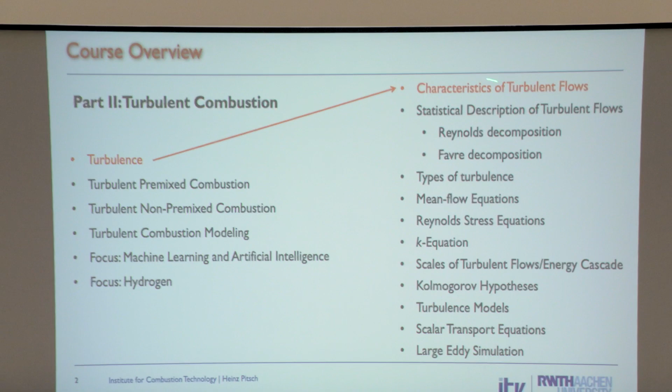The next lecture here is on turbulence. We're going to talk about turbulent combustion, but before we do this, I want to give you an overview of what turbulence is. So we'll talk about a few characteristics of turbulence, statistical description, the so-called Reynolds decomposition. Then we talk about the mean flow equations, something like the kinetic energy equation, and then really the core of all turbulence theory, the so-called Kolmogorov theory, and then we talk a little bit about turbulence modeling, and here maybe large eddy simulation.

So what is turbulence? Turbulence is composed of eddies that mix, and turbulent flows are random—they are not predictable, not deterministic. They lead to much faster mixing than laminar flows. That's why almost all technically relevant flows for us, combustion where we need mixing, are turbulent, because then you can accomplish reactions much faster.

Now, what's interesting is if I take a mixing layer, I have just fuel here, I have just air here, and then I let them mix in a laminar way, it just takes forever. It's just diffusion. Now, there's one way of mixing.

There's another way of mixing where I would say take two immiscible fluids. They wouldn't diffuse into each other—like oil and vinegar, whatever, or oil and water. They don't mix with each other really well. And so let's start to stir them.

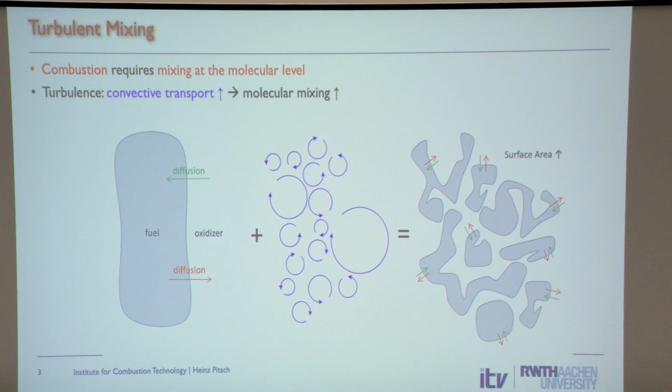In the beginning, I had just fuel here, oxidizer there, and then I start stirring—that's what the turbulence does. Then I get regions that are just fuel, and other regions that are just air. The turbulence itself just moves stuff from here to there. That's what it does, nothing else.

So did I increase the mixing rate up to that point? No, because I still have only fuel and air—no mixing has happened. But what I did is I increased the surface area a lot, and because turbulence also causes local strain, I also increased the local gradients. And that, of course, makes mixing much, much faster.

So when we think of turbulent mixing, we often think of it like this: we have this stirring, and then the stirring leads to surface area, and then we get molecular mixing.

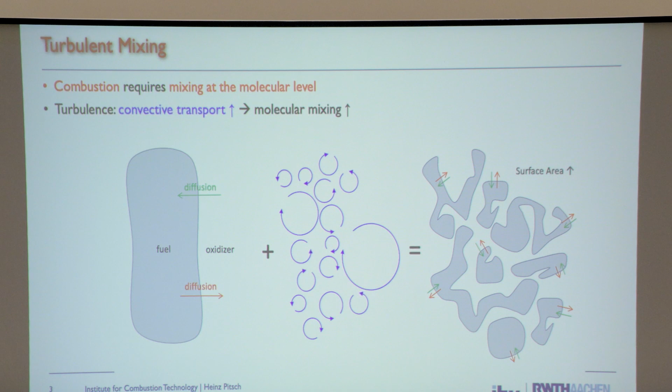Now, when turbulence people, fluid mechanics people think about turbulence, they very often don't care about exactly what the mixing rate is. They worry more about—here I had just fuel, just air, and here they seem to be mixed, okay. But for us, it's very important that if you want to have chemical reactions, you need to mix fuel and air really on the molecular level. If the fuel molecule and the oxygen molecule are not next to each other, they can't bump into each other, reactions are not going to happen, okay?

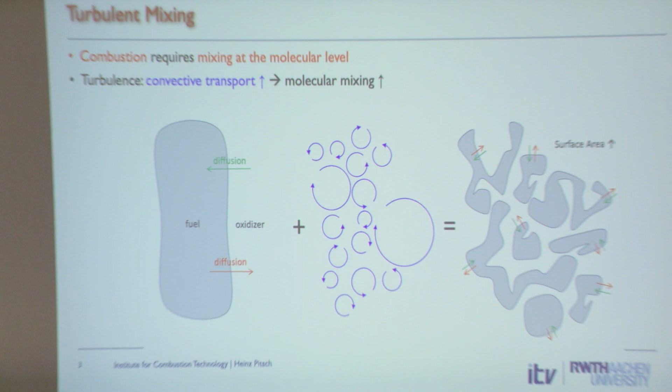So for us, it's not the large-scale stirring that is very important. For us, really, the ultimate outcome of how much fuel and air really mix on the molecular level, that's what's important for us. So that is something we need to keep in mind.

Now, we often think of turbulence as these eddies—so here you see we have large eddies, smaller eddies, and yet smaller eddies. The other thing you see is if you have a large eddy—I should redraw the picture—but if you have a large eddy, maybe it steers things this way, then inside that large eddy you can have a smaller eddy, and it might go the other way. And inside that, you have yet smaller eddies, and they go yet the other way.

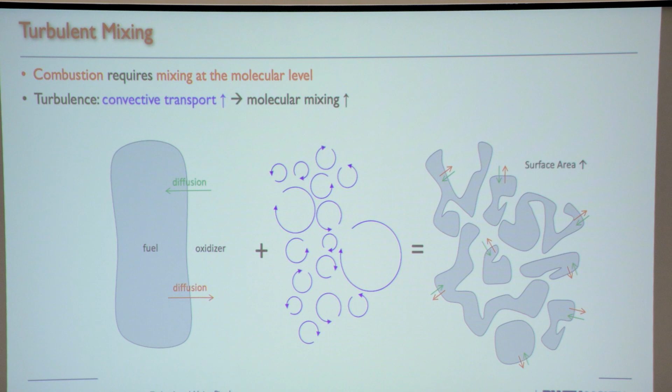And that makes up the chaotic nature of turbulent mixing. Now, turbulent eddies—maybe turbulence doesn't really consist of eddies, but we say turbulence has different length scales, and I associate a length scale with an eddy of that size. It just helps thinking about it.

We have different velocity scales. The large turbulent motions have a certain velocity associated with them, and the very tiny turbulent motions have a different velocity, maybe the spinning velocity of the eddy. So we look at an eddy like this: it's characterized by a length and by a velocity.

From these two, of course, you get a time scale also, but the time scale is not independent—it's just the length scale divided by the velocity scale. Also we need to keep in mind we have different size eddies, and they can superpose onto each other. Each size is characterized also by a different velocity or time scale, whatever you want.

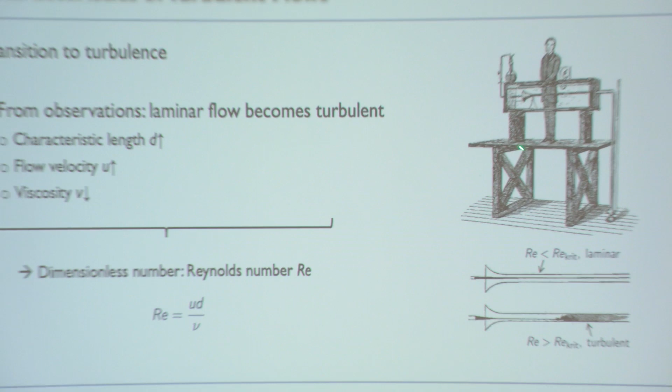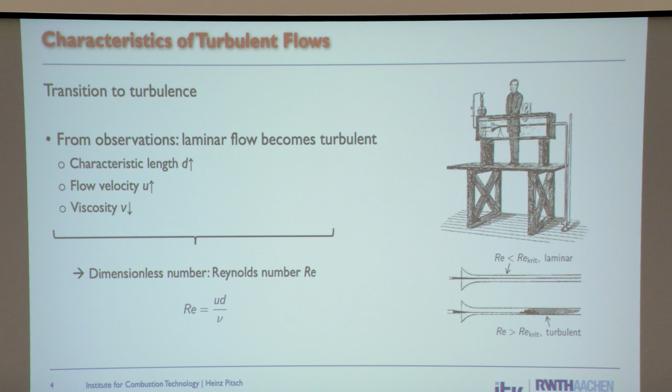So, here's Osborne Reynolds in Manchester, doing his famous experiment. He has this pipe with a flow through it, and he puts a dye in at the beginning—there's this black line, the dye—and then he observes what happens to the dye. Nothing happens to it; the dye doesn't really mix with the rest.

Then he thought, what if I increase the Reynolds number? No—what if I increase the velocity? So he increased the velocity, and all of a sudden this thing bursts up and mixes instantaneously. And he thought, oh, that's interesting—so it depends on the velocity.

And then he thought, what if I increase the diameter of the pipe? So he used a bigger pipe, and bigger, and then he saw again it bursts like this. It's also a faster transition with a larger diameter.

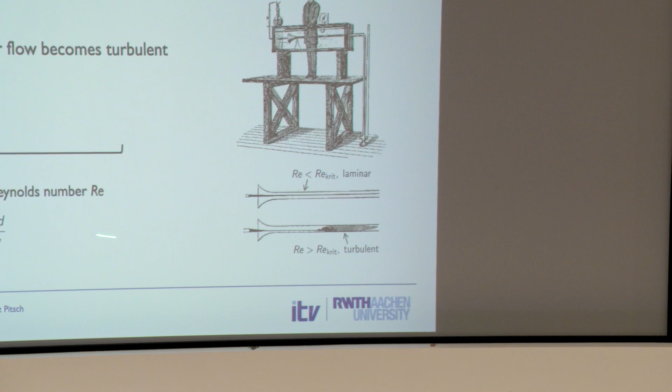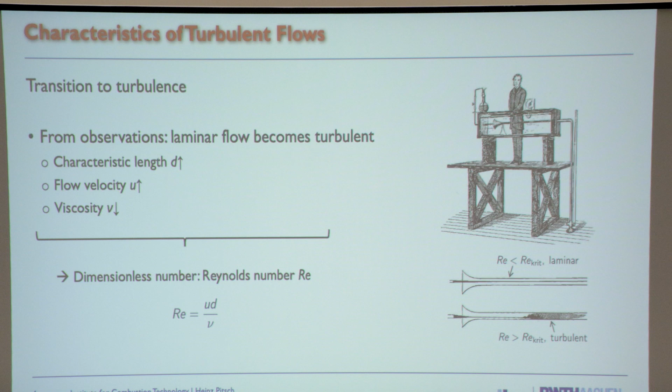Then he used different fluids with different kinematic viscosity, and found it's inversely proportional to the viscosity. Another way to do this is to take the incompressible Navier-Stokes equations, make them non-dimensional, and a non-dimensional group pops up in front of the viscous term, which we call the Reynolds number.

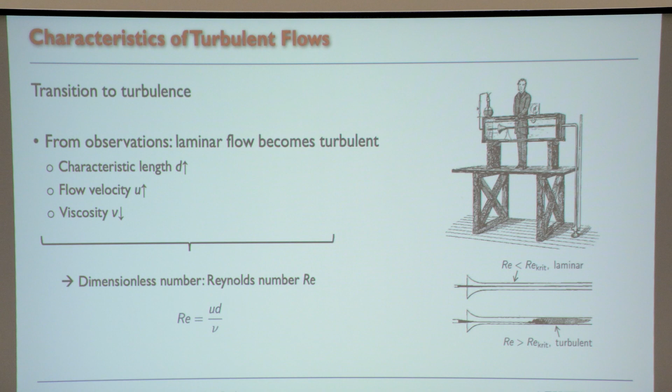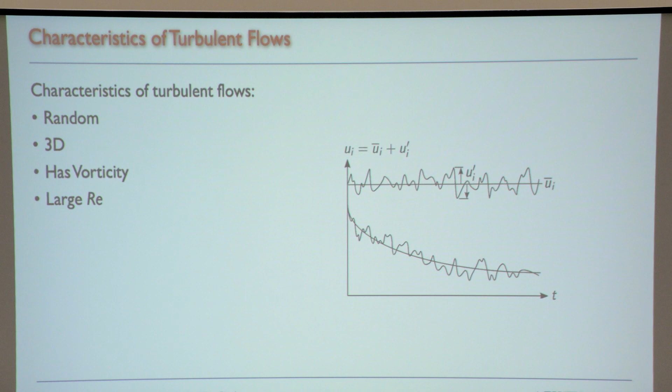Now, one thing we didn't say: turbulence is always 3D. We're not going to talk about this much more, but it turns out if you have a two-dimensional flow, it cannot be turbulent. That's because of what's called vortex stretching—the mechanism for turbulent dynamics depends on a process where you have a vortex, and it's being stretched.

In fact, the transfer of energy from the large to the smaller scales happens through this vortex stretching. If I have a vortex in 2D and want to stretch it, I need the third dimension—I can't stretch it in two dimensions. So turbulence is always 3D. That's why large eddy simulations, where we try to resolve some of the turbulence, are always 3-dimensional simulations—you cannot do a 2-dimensional simulation where you want to resolve part of this. Same for direct numerical simulation; they're always 3D.

Do you see anything else here? Vorticity is important. And of course, this transition happens at large Reynolds number.

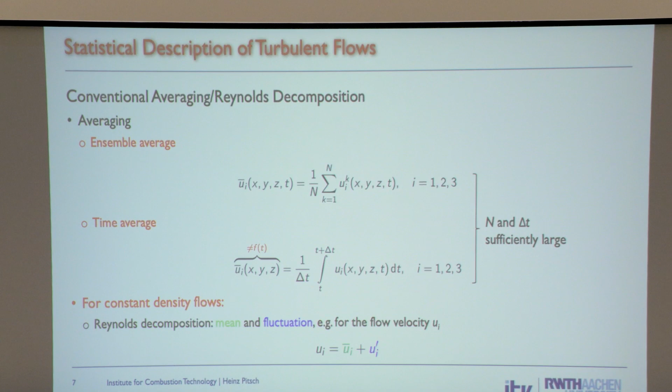Now, one important technique to analyze turbulent flows is the Reynolds decomposition. In engineering, sometimes we are not interested so much in the fluctuations. We're interested in the mean mixing rate. The fluctuations happen on very short time scales, but we're really interested in seeing, for example in this engine, do we have enough space, do we have enough residence time for fuel and air to mix. So we are often interested in mean quantities, which is why we introduce this Reynolds decomposition, where we say the local instantaneous velocity, we decompose it into a mean and a fluctuation.

So how do we define the mean? There are different ways to do this. One would be to take what's called an ensemble average: I do many experiments at one point, and I just take the average of these individual experiments. I could do this at every point in this room, and I get a mean velocity at every point. The other way would be to take a time average, but that only works if the mean is independent of time.

If the mean is a function of time, this doesn't work. People sometimes say, well, maybe I make the averaging window not so large. No, then you don't get the mean. For the mean, to really get the mean, the time averaging window has to be infinitely long, right? It has to go from now to infinite time.

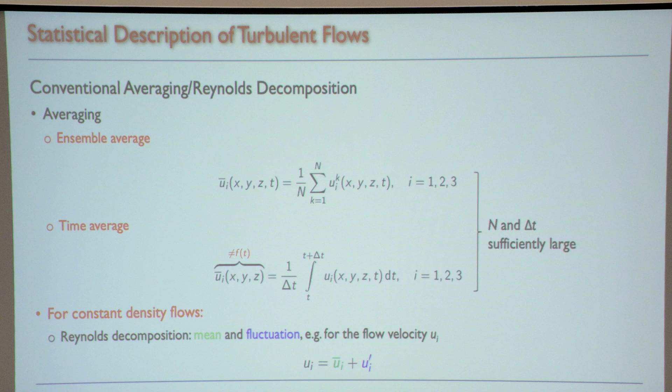So when I think about this, I always think of the ensemble average, for two reasons. First of all, it's a correct definition, it always works. Secondly, it's a sum, not an integral. Most people find a sum easier to think about than integrals, even though it's the same anyway. This also makes it a little easier to work with differential equations sometimes.

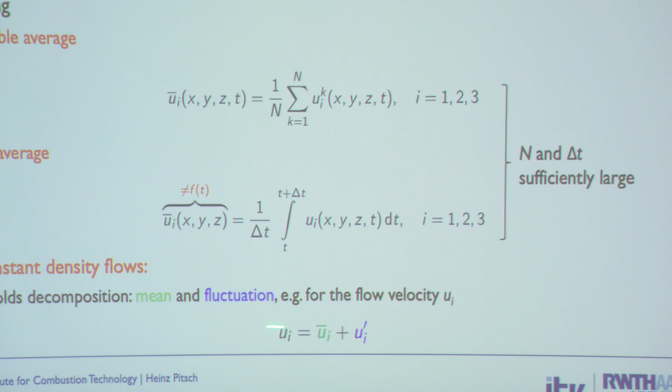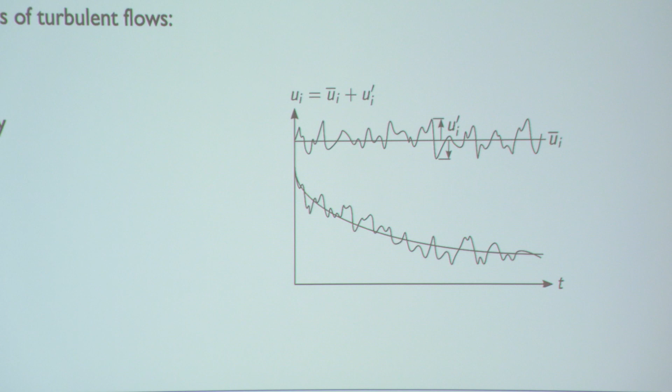So that's what we do. We do this Reynolds decomposition where we define the mean like this, and then the fluctuation is just the difference between the local instantaneous value and the mean. Going back to this picture, at each point in time, the mean is the straight line, and the fluctuation is always the difference - sometimes positive, sometimes negative. It's defined such that the average of the fluctuation is 0, and using this definition, it's very easy to show that this will be 0.

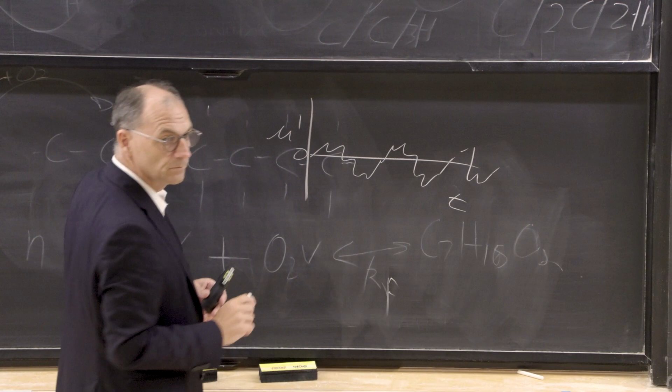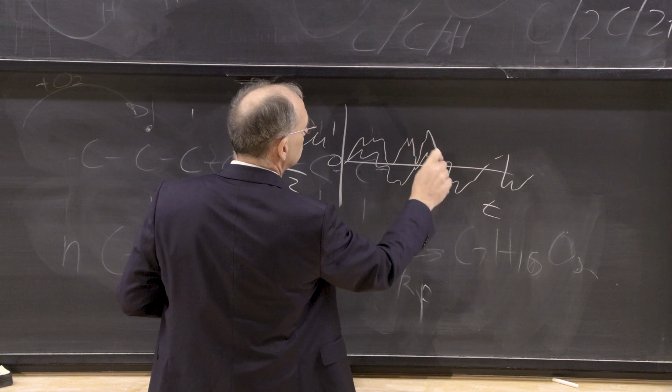Then, if you have one fluctuation times another fluctuation, and you average these, they're not necessarily 0. An easy example: if I have a velocity fluctuation, u prime as a function of time, fluctuating around 0, then if I average this, it will be 0. But if I take u prime squared and average this - the square of it - it will be all positive. And if I average a positive function, then it's not 0. So correlations of different fluctuating quantities are not 0.

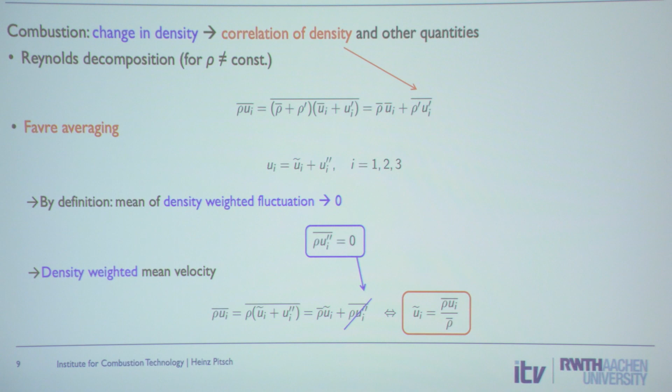So in fact, we call this - the example I just showed - something like the standard deviation, or as we call it here, the root mean square. So this is the fluctuation squared, mean, root. It should be called square mean root, but it's called root mean square.

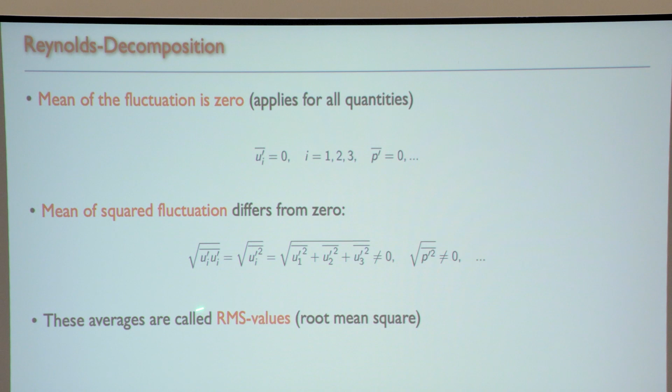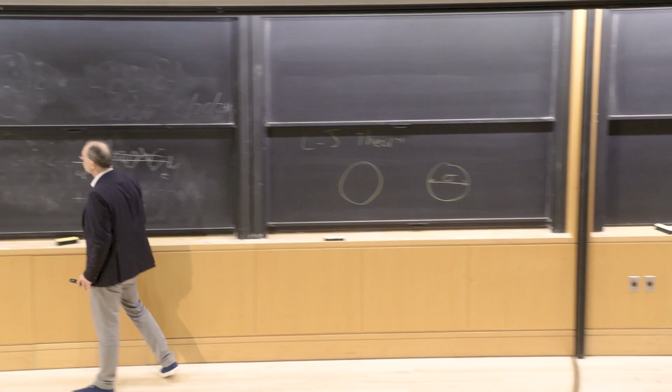So what's interesting is, if I write the Navier-Stokes equation, in our case we typically have variable density flow. If we have variable density flow, then I start here with the momentum equation. The first term is d(rho u) divided by dt.

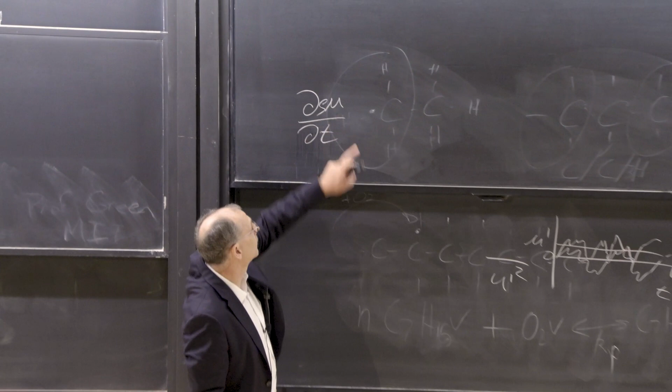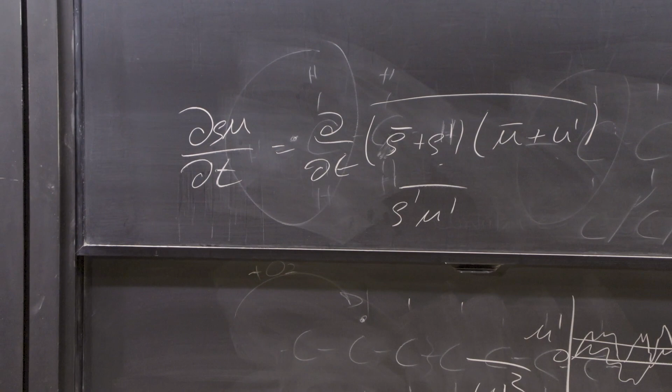If I introduce the Reynolds decomposition here, I get d by dt of rho mean plus rho prime, times u mean plus u prime. You see I get a term rho prime u prime, and when I take the average of this, I get a lot of these terms—a lot of correlations between density and something else. So that makes things very complicated.

So somebody came up with a smart idea to introduce a density-weighted average, defined in a way so that these correlations don't appear. That's shown here—that's called the Favre averaging. So that's typically relevant for us.

So this is what I just wrote here. Exactly, so I get these correlations. And now I introduce the Favre averaging. I call this U tilde and U prime prime—it's different from Reynolds averaging. So I define this, and I get these correlations. I want to define it so that these correlations here are 0.

If I take rho u mean, it is rho times (u tilde plus u prime prime), which is rho mean u tilde, plus rho u prime prime mean. I define it now so that this term is 0—that's my definition of the mean. Then I can solve this for u tilde, which is rho u mean divided by rho mean. So if I define my mean like this, then this will be 0.

So that's what we call Favre averaging, and it leads to the fact that, if I do the same thing here and average this, it just gives me rho mean times u tilde. So I don't get these nasty correlations.

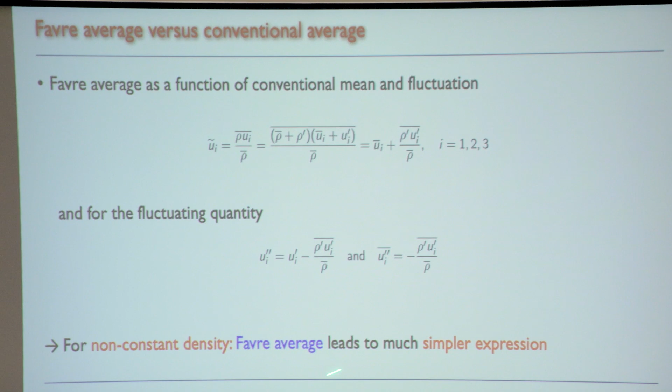The only point where you need to worry about it is when you want to compare a simulation with an experiment, because the question is: did the experiment evaluate this mean or that mean? That's important to know. So for non-constant density, Favre averaging leads to much simpler equations.

They describe all the randomness of turbulence, which for a long time was questioned by researchers—before one was able to solve these, they said an equation, if you specify initial conditions, is deterministic. But of course now, with chaos theory and so on, we know that's not true.

You always have a disturbance, inaccuracies. You cannot specify a state to absolute accuracy, and even though you think you have exactly the same state, it's very slightly different. These perturbations in a nonlinear system can grow up to the point where they are of leading order.

And so this will change the local fluctuations. It will not change the mean, but it will change the local fluctuations. So that's what we say—the local fluctuations cannot be predicted.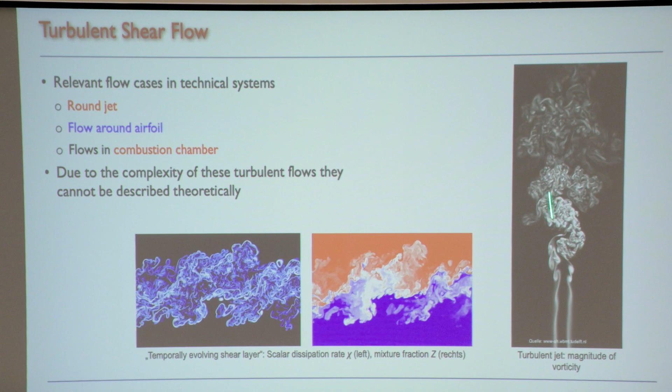So these are a few examples of relevant cases: a round jet is a relevant case, a flow around an airfoil, for example, flow in a combustor. And we are typically concerned with flows that are related to combustion.

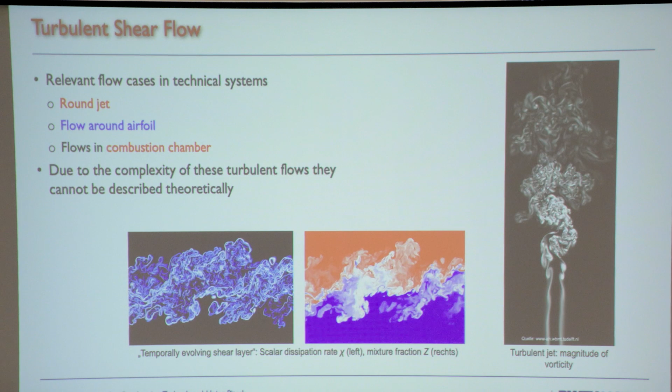Now there are two different ways to produce turbulence. Turbulence comes from gradient, from shear. You have shear and you have viscosity, and that creates vorticity. The vorticity then makes large eddies, and they make smaller eddies, and so on.

So there are two ways to produce shear. One is to have a free shear flow—I just shoot material into another material, like here in this jet. The second way to have a gradient or shear is to have a flow along a wall, because a wall always has a no-slip condition.

The flow at the wall, the velocity at the wall is always zero. And if I flow past the wall, I get shear. I get a boundary layer and I get shear. So we distinguish between free shear flows and wall-bounded flows when we talk about turbulence. And because in combustion we usually try to keep it away from walls, the generation of turbulence typically comes from these free shear flows. So here we are more concerned with free shear flows than with boundary layers. We're not going to talk about boundary layers here.

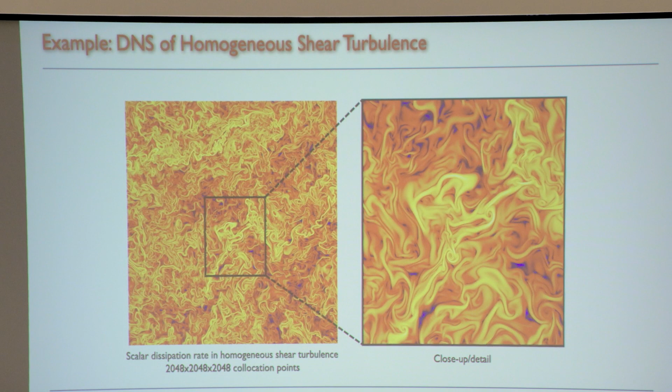Now, one thing that's interesting is we said earlier you have these turbulent eddies. And if you look at a picture like this, you don't see an eddy. I don't see anything that's really spinning. But what you do see, if you look at it, you kind of see coherent regions, I would call it.

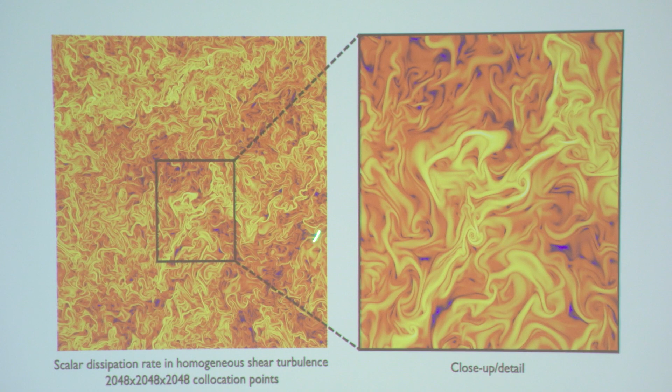I would call this yellow spot a coherent region. This dark spot is a coherent region. And then if I look inside this coherent region, here, if I look down at the larger scale, again here I get a spot where I would say this seems coherent, here a darker one, here a darker one, and so on. So you get these, and if you would look at the motion, these are regions also that kind of move together. They don't go like this, but they kind of move in a coherent way. But then inside these coherent structures or motions, you get smaller coherent regions, or here actually you see an eddy really, or even smaller coherent regions. So you get a lot of different scales.

So we have sometimes in these simulations - this is a simulation of a shear layer - you have a flow that goes to the right on top, a flow that goes to the left on the bottom, and this here really just shows the scalar dissipation rate. This is really the local mixing rate. This is where we have strong turbulence, and you see that you get a strong change if I go from the top here to the bottom, if I look at the cross-section.

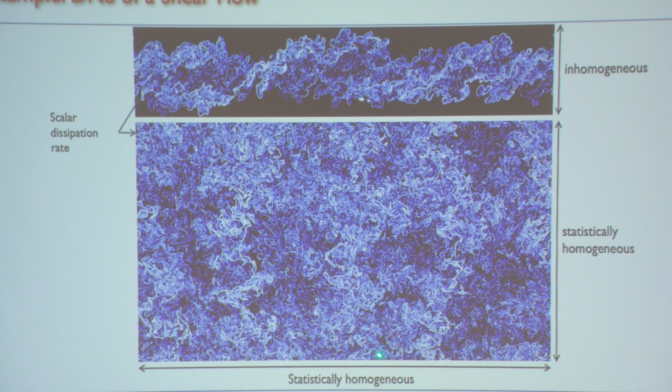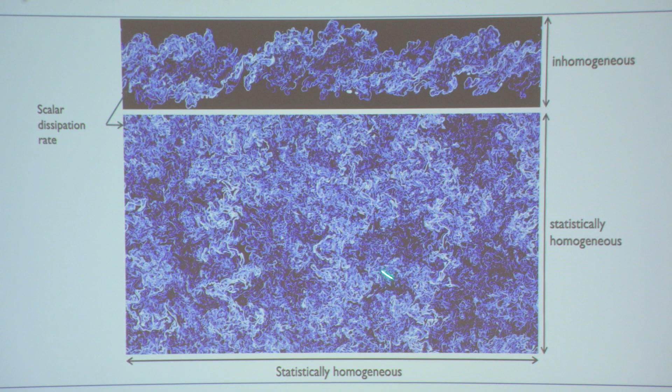But if I look at this thing from the top, that's how the simulation is done. It's homogeneous in this direction. It's all the same in this direction. But you see there are changes, so we say it's statistically homogeneous. The average values are all independent of position in this direction. But of course, locally, or at one instant in time, it is different.

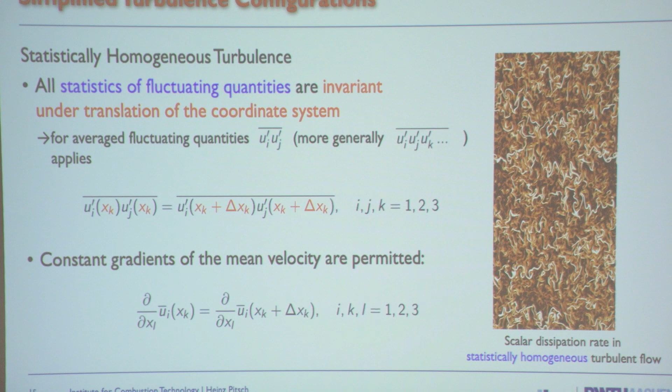So from that we define something very often used in turbulence theory, and also when we do simulation - these DNS simulations. Oh, I didn't say what DNS simulation is, sorry, I got sidetracked. So what is DNS simulation? We know how to write the Navier-Stokes equations. We know they describe the turbulence. So we can actually solve the Navier-Stokes equations without any assumptions. And that gives us simulation results like this, if the Reynolds number is large enough.

The problem is, and I'm not sure if this is mentioned here somewhere, how large these simulations are. So this simulation here is a very simple flow. It's, let's say, a small box, a cubic centimeter of turbulence. It's a relatively high Reynolds number, but the simulation is done on 2,000 times 2,000, in 3 dimensions, 2,000 cubed points - that's like 8 billion points.

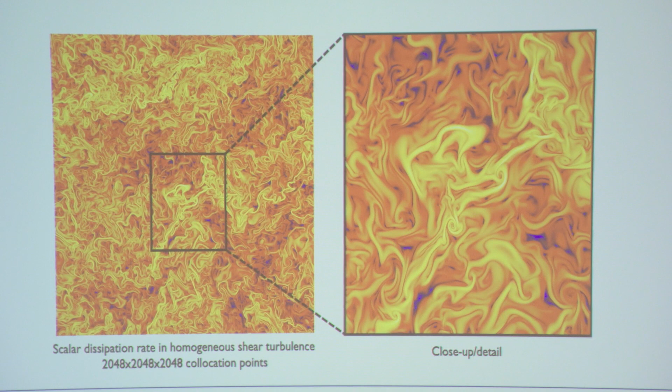And then imagine we want to do combustion. So 8 billion points, we have 5 degrees of freedom - we have the pressure, and 3 velocities, and let's say the density in our case. So that's 8 billion times 5, which is 40 billion degrees of freedom. And then if we do multi-step chemistry, maybe you have 40 species or so, then you are more at 50 times 8 billion, which is 400 billion degrees of freedom. So these simulations, even if you look at a very small box, get very, very large.

So we don't use these to compute a full combustor. We use these to compute a small little thing to understand what's going on.

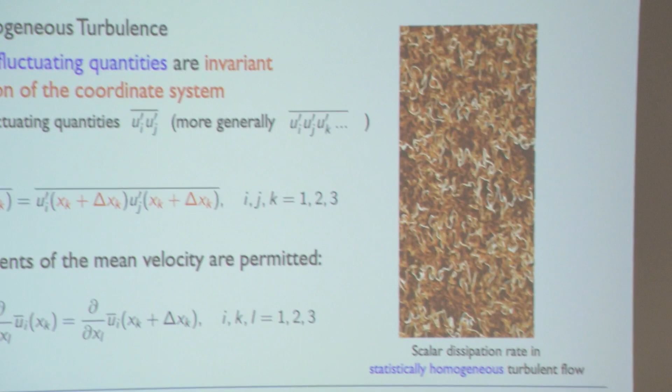Right, so when we do these simulations, it's good to have simple systems. So sometimes we define these simpler configurations. One is called homogeneous turbulence.

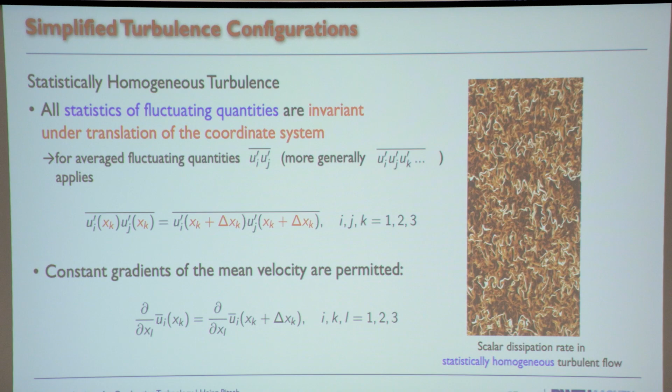Homogeneous turbulence means the turbulence statistics are invariant under translation in space. Which means if I measure turbulence statistics here, I get a certain velocity fluctuation in this direction, and maybe a much smaller velocity fluctuation in this direction. But I measure these, and then I go to some other place in space, I measure velocity fluctuation in this direction, I get the same values as over there. It doesn't mean they're the same in all directions, it just means they're the same everywhere in space.

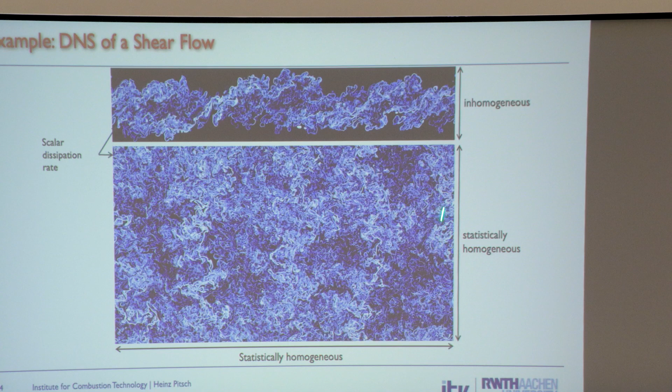That's kind of like what you see here - no matter where you are, it always seems to be the same. The local velocities are not the same, but the statistics will be the same everywhere in space. It will be different in this direction or in this direction, but they're independent of where I sit in this plane. So that's what we call homogeneous turbulence.

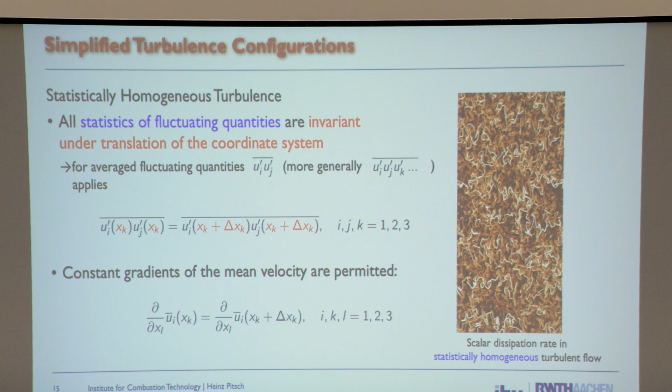The nice thing about homogeneous turbulence is that since it's the same everywhere in space, it gives you a lot of easy statistics - you can average the statistics over the whole space. At the same time, it allows you to have a velocity gradient, as long as the velocity gradient is the same everywhere. So you can have a constant shear, and constant shear means you produce turbulence. So homogeneous turbulence is nice because it produces turbulence.

The other simplification that we often make, which is also very technically relevant, and I'll tell you later, or maybe tomorrow, why this is relevant, is what's called isotropic turbulence. Isotropic turbulence means the statistics are invariant under translation in space, but also invariant under rotation of the coordinate system.

Which means I measure velocity statistics in this direction, I get a certain value, and then I turn around - or I close my eyes, you turn me around, and then I open my eyes, I'm in a different direction. Now I measure velocity statistics in this direction, and I get exactly the same. It's the same in all directions.

There's no directional dependence, which means the mean velocity needs to be 0. If the mean velocity goes this way, it's different from this way. So the mean velocity is 0, and then you get fluctuation in all directions. Because the mean velocity has to be 0 everywhere, there's no turbulence production. So this leads to decaying turbulence - you start out with turbulence, but the turbulence decays away.

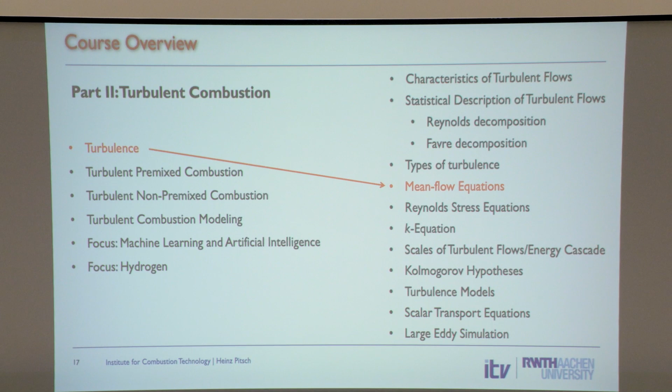Let's look at the equations - mean flow equations, that's interesting actually. So here we do this just for incompressible flows because it's easier to understand. But of course, if you want to do this for combustion, you have to do variable density equations, and you need to use Favre filtering or averaging, not Reynolds filtering.

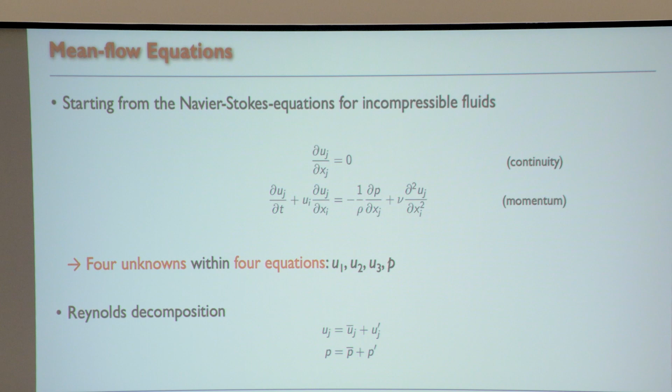So this is the continuity equation, and this is the momentum equation. One thing you probably know is that here we have the convection term - it's a time-dependent term, the pressure term, and the viscous term. Again, if we think of what these terms mean, du/dt is clear what it means - it's the time rate of change of the velocity at one point.

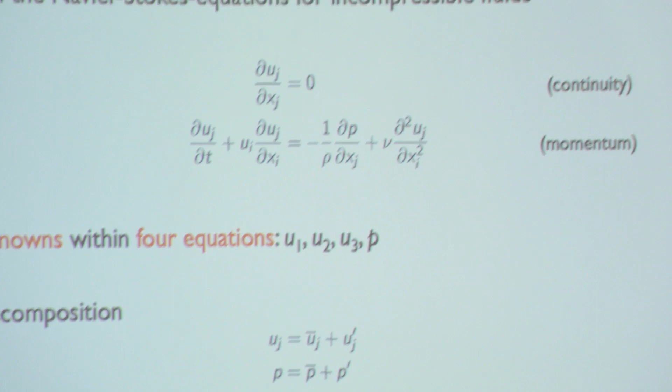This convection term is basically - these equations are written for a fixed point in space. So if I sit here and somebody walks by, I just sit here and look in this direction. Somebody walks by, I first see it getting dark, and then I see it getting light again. That's what this convection term does - it just pushes the fluid through a certain point. Which means if I have a velocity hump here, and I sit here, and the convection pushes this by, then I see the velocity go up and then go down. So that's exactly what this does.

And the funny thing is, this thing wants to push the velocity by, but it does it with the velocity. So, let's say I have a velocity gradient that looks like this.

So here's u as a function of x, and the velocity looks like this. It's low here, and high here. So this is positive velocity, it would push stuff in this direction, but it would push this point not as fast as this point. So a little later, this profile looks like this, because the higher velocity moves faster. A little later it looks like this, but this gradient will get larger and larger—that's a nonlinear effect.

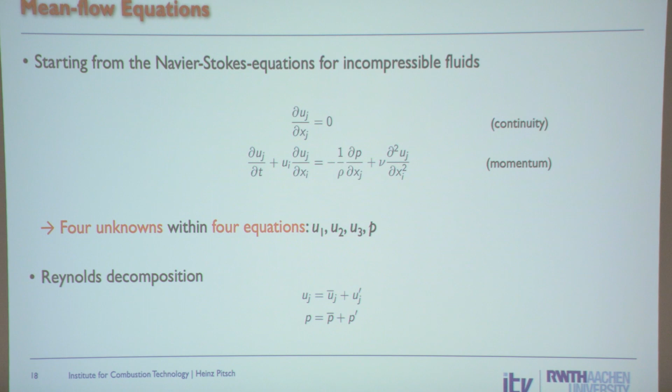How do you see this? Look at the equation, this term is nonlinear: u times u, that's the thing. All the rest of the equation is linear. So if you think of turbulence, turbulence is something chaotic, which means there must be some nonlinearity, and that's the nonlinearity you see in the equation. This is the term that causes all the interesting stuff in turbulence. Without this term, there's no turbulence. This is also the term that causes shocks. Anything complex always comes from this term.

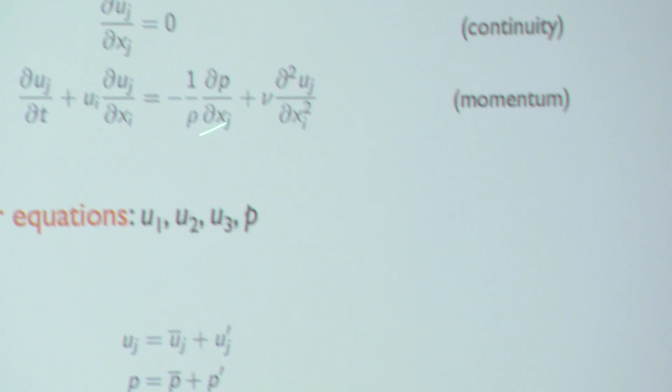So the viscosity, of course, tries to do the opposite. You have a profile that looks like this, and viscosity says a little later it looks like this. So this term tries to make the gradient really large, and the viscosity says no, I want to make the gradient really small. It distributes stuff in space. So this is the Joker, this is Batman—this one always tries to make chaos, and this one always tries to say no chaos, we have to take it easy.

And then the pressure term is just acceleration. If I want to move something from here to there, like move this desk, I need to push on one side and not on the other, then I move the desk. If I have higher pressure here and lower pressure there, stuff moves. So if I want to move fluid, I need a pressure gradient—a pressure gradient will accelerate the flow. We call a favorable pressure gradient one that accelerates the flow, and an adverse pressure gradient one that decelerates the flow. That's all the pressure does.

It's funny because push and pressure in German is the same word. Isn't that interesting? I think in German it's much easier to understand the effect of pressure, because the German word for pressure is the same as push. Anyways.

Okay, so that's what these terms do. And what was I trying to say? I mean, all the interesting stuff needs to come from this term. That's it. Oh, what I really wanted to show you is this.

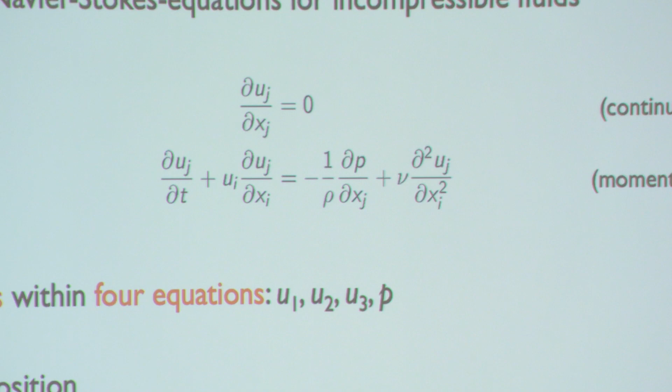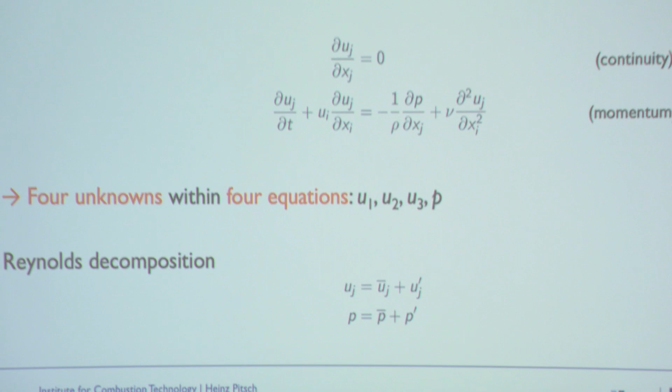Here we sometimes write this in what we call the non-conservative form. We say ui times duj by dxi. But that's the same thing as dui uj by dxi equals this plus uj times dui by dxi, and this here is zero by continuity—the first equation up there says this second term is zero. So this means I can always push ui inside or outside the derivative, it's the same thing. We use this form sometimes, so that's why I'm showing you this.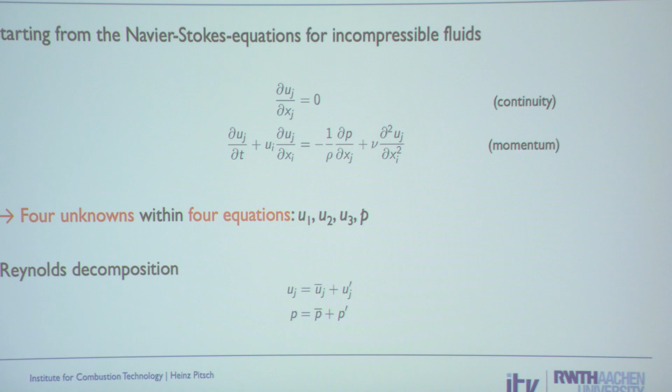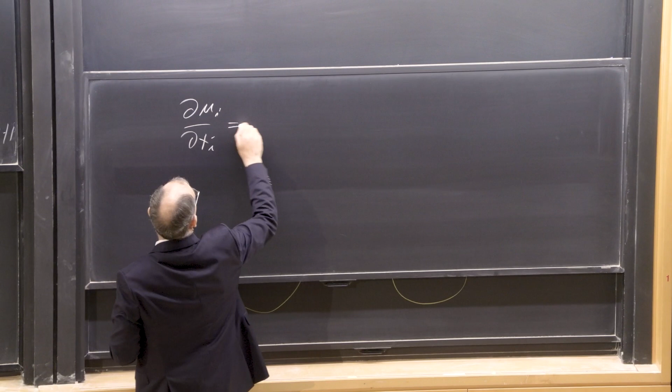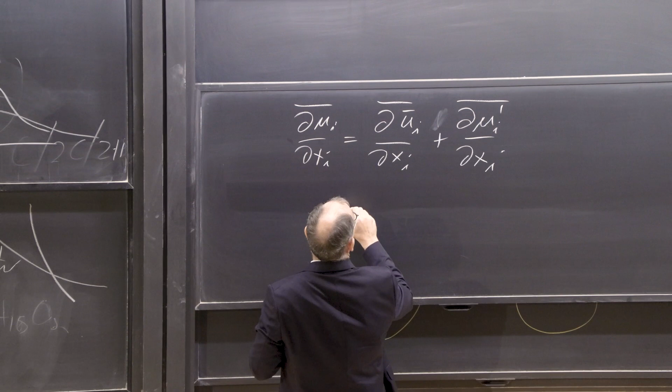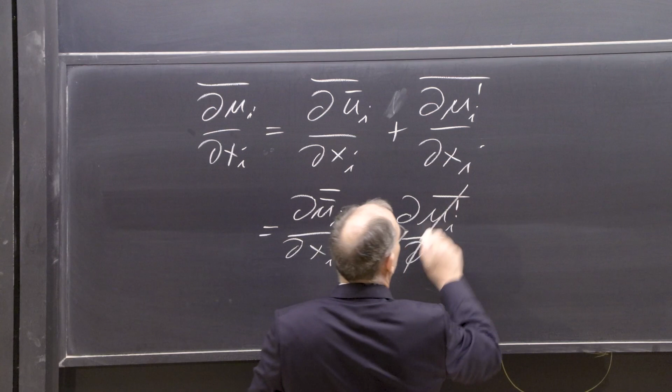So let's introduce this Reynolds decomposition into these equations. We start with the continuity equation: dui by dxi equals dui mean by dxi plus dui prime by dxi. That's just introducing the Reynolds decomposition, and now we average the whole thing. The averaging operator commutes with the differentiation since it's a sum. So I can write it as dui bar by dxi plus dui prime bar by dxi. The second term here is zero by definition, and the first one is ui bar—but if I average a mean quantity, it's still a mean quantity, so I can take the second bar away. Then you see the mean continuity equation is just this.

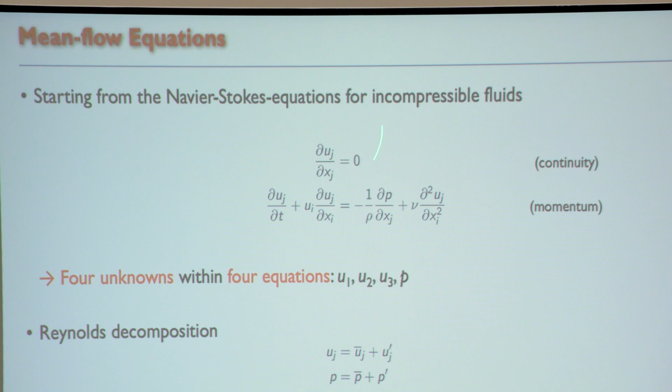And if I subtract this from the original equation, I find this is also true. So the continuity equation says an incompressible flow is divergence-free—that's what this says. The mean velocity field is also divergence-free, and the fluctuation field is also divergence-free. What's interesting is that the equation for the mean looks exactly the same as the equation for the instantaneous quantity. And why is that?

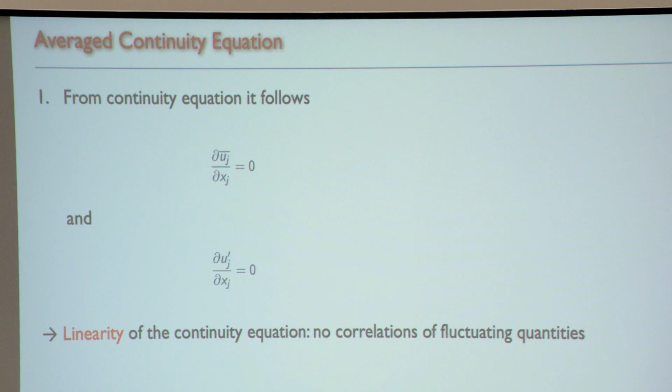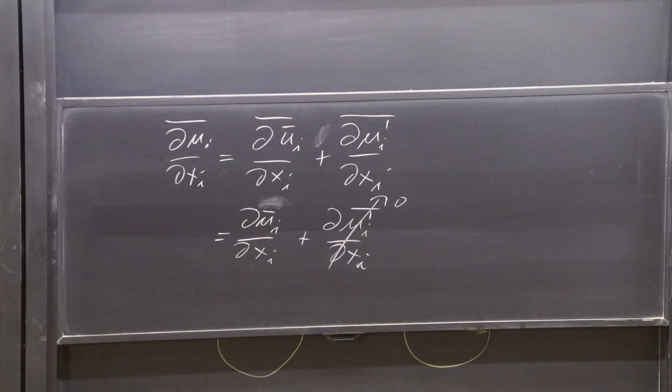That is because it was a linear equation. For a linear equation, I can always split these two up and I always get the same result. So if we look at the momentum equation, all the terms are linear, and you will get exactly the same thing. This term here will just have the bar, u-j bar. This will be p bar, and this will be u bar again. All the linear terms will do exactly the same.

But luckily we have a nonlinear term also, otherwise we would be bored by now. So let's look at the nonlinear term. I said I can move the u-i inside by continuity, so I get this. Now we introduce the Reynolds decomposition for both of these: u-i bar plus u prime, and u-j bar plus u prime. And I get 4 terms from this: a u bar term, then one u prime term, and then u prime.

And then I take the average of this. It's always the same when you derive these equations: first introduce the Reynolds decomposition, then do the averaging. You see the first term is an average already, so that doesn't change. This one here is then the u prime average, which is 0 by definition. This one here is also 0 by definition. But if I average this last one, we said earlier this is non-zero. So this term here remains.

And it turns out, when I put that back in the equation, this is how the equation looks. As I said, the time-dependent term doesn't change really, it's just written for the mean. Then this comes from this term here - it's just the convection term written for the mean quantities, pressure for the mean pressure. This was the viscous term, and now this is the new term.

And the question is: is this term important or not? Can we neglect it or not? What do you think? Who thinks we can neglect it? Who thinks we cannot neglect it? Okay, very good, thank you very much.

Of course, if we could neglect it, then turbulence would have no effect, right? Because then it would be exactly the same equation, same boundary conditions, and you would get exactly the same solution. But this term - I didn't say this before, but you can show that for a turbulent flow, you need a certain Reynolds number for the flow to become turbulent. And at that minimum Reynolds number, you can show that the mixing is 100 times faster than for a laminar flow. So even the mildest turbulent flow mixes 100 times faster, and this all comes just from this term.

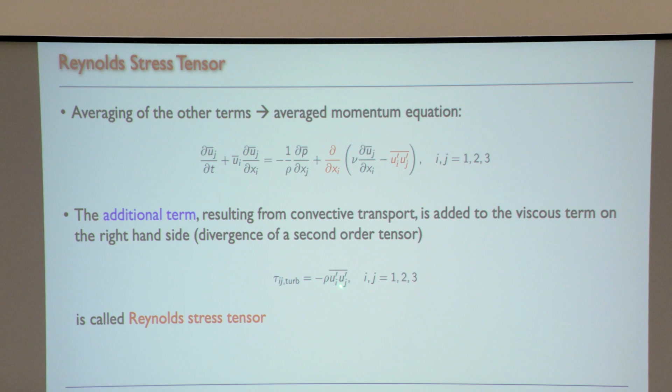So that's what we call the Reynolds stress tensor. It's a tensor, u-i u-j, and it has nine individual terms. It's symmetric, so it has only 6 independent terms - the upper right are the same as the lower left, but it has 6 independent terms.

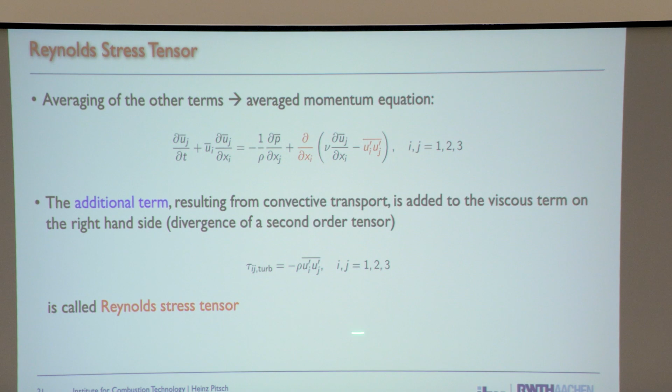And what's interesting is we don't know what these are. If you look at this here, this was our system of equations - we have 4 equations, one here, and 3 more here, one for U1, U2, and U3. So we have 4 equations: 3 velocity components and the pressure unknown. This was incompressible, so the density is given, so we have 4 equations for the unknowns. Here, now, this was 1 equation plus 3 more equations, but now we have the mean pressure, 3 mean velocity components, and 6 components of the Reynolds stress tensor. So we have 10 unknowns but only 4 equations.

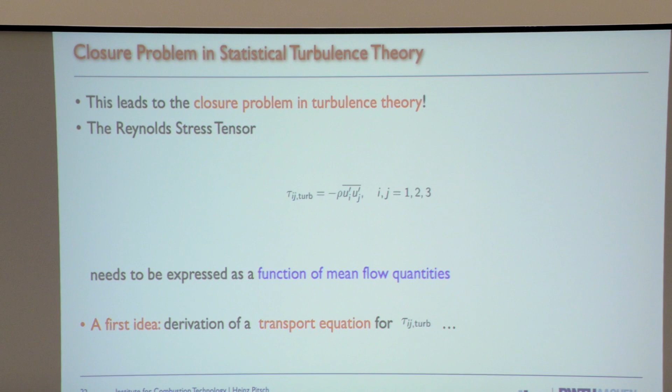So that's what we call the closure problem in turbulence theory. These equations, we cannot solve them - we need more equations, we need 10 equations if we have 10 unknowns. So this is the quantity we're talking about when we talk about modeling - this is the quantity we need to model.